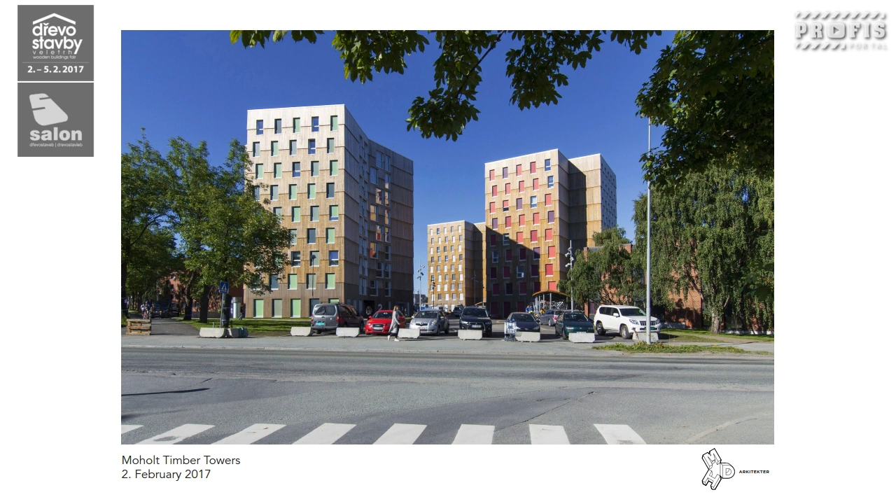The project came into the office in quite an unusual way, through a competition win. What wasn't so usual about the competition was that young architects were invited, architects with less than 8 years of experience, together with a more established firm. So for this competition, we collaborated with an older office, a one-man office, Arne Henriksen, and we were fortunate enough to win it. That was in 2013.

This ambition for the student organization in Trondheim to invite young architects was a clear signal to us that they really wanted to do something else, something new.

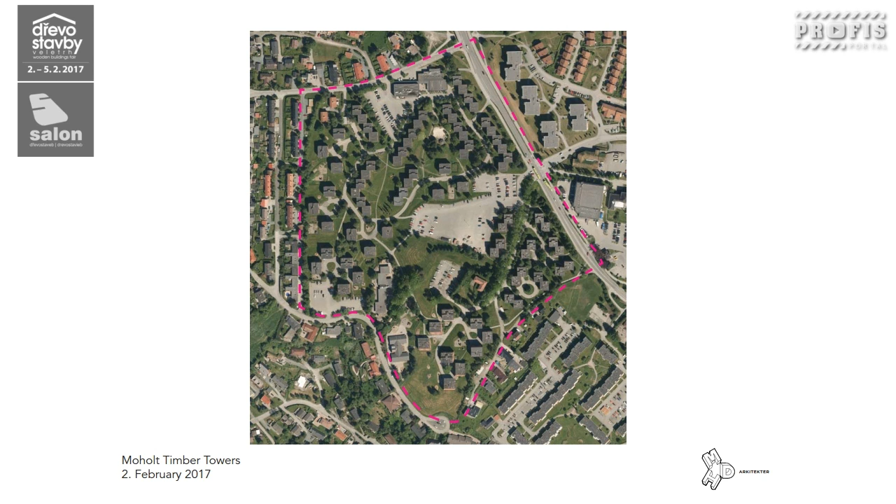The project is called Moholt 50/50 because it represents a milestone for the student village. The student village, which you can see here with the red marking around it, was built between the 1960s and 1970s. The competition was organized when the Moholt student village turned 50 years, and it sought visions for 50 years ahead.

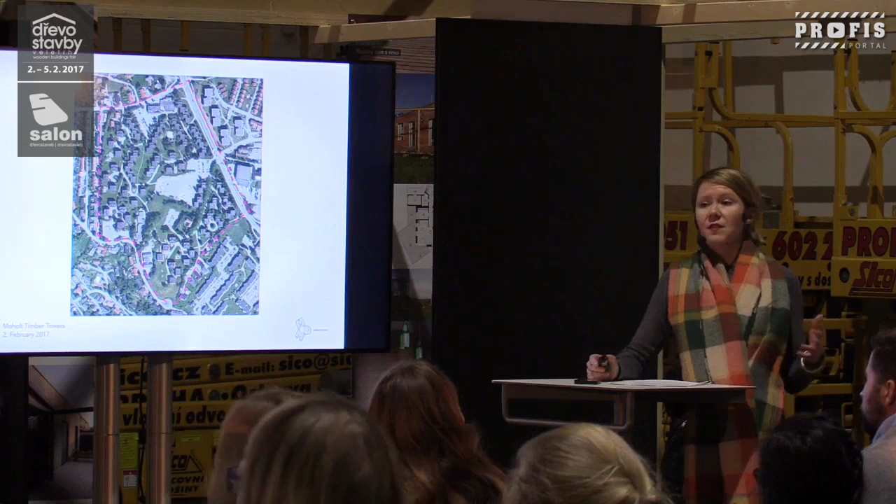That they wanted a vision for 50 years ahead was also promising, because they own these buildings and manage these buildings. So they wanted something that was manageable and sustainable for 50 years ahead in time.

So it was a quality ambition, a little bit out of the ordinary for housing. Many times when you build housing to sell, once you sell it, you're not so interested in the sustainability or manageability further in time. You just want to sell it quickly and easily.

But the student organization was interested in solutions with ecological benefits for a long-term perspective, with maybe a little bit more expensive investment, but which would pay back in the course of the coming years.

Student accommodation, this is the existing buildings. Student accommodation often plumbs the depths of mediocrity, like hutches stacked up in the simplest, cheapest way, without any support programs, left to themselves in a kind of anonymous place.

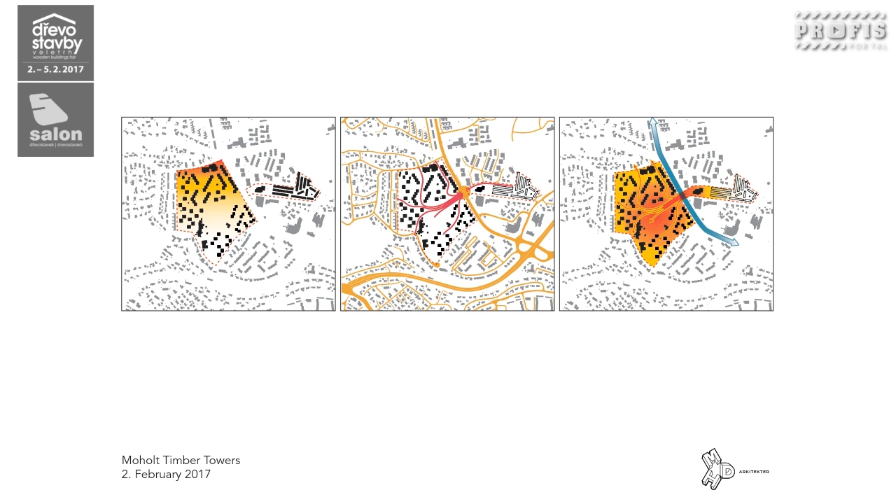Here's a big road, and there's the collective transport, so all these houses would have easier access to the collective transport through the village. It also encourages collective transport.

So the meandering street, almost like a river, which when split up into smaller paths, became the organizing element for the whole project.

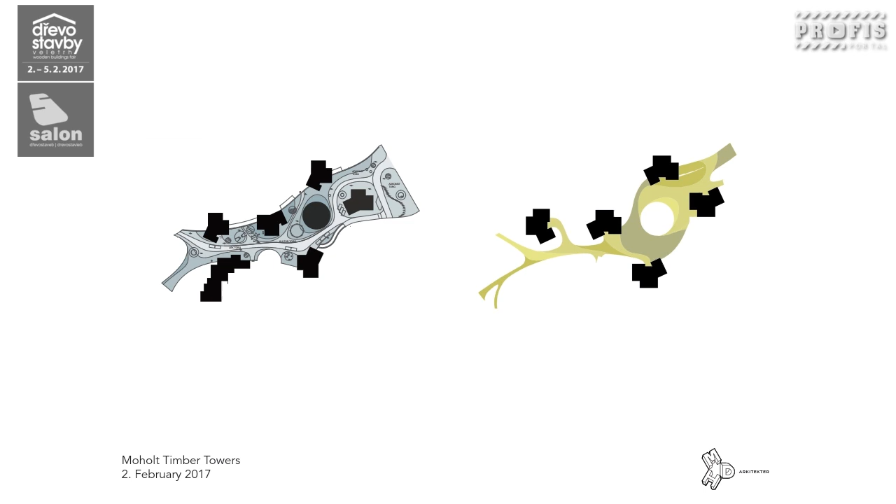The landscape plan was very important. The whole Moholt Allmenningen, as it's called, or Moholt Commons, consists of play spaces, benches and planting, and simply places where people can meet.

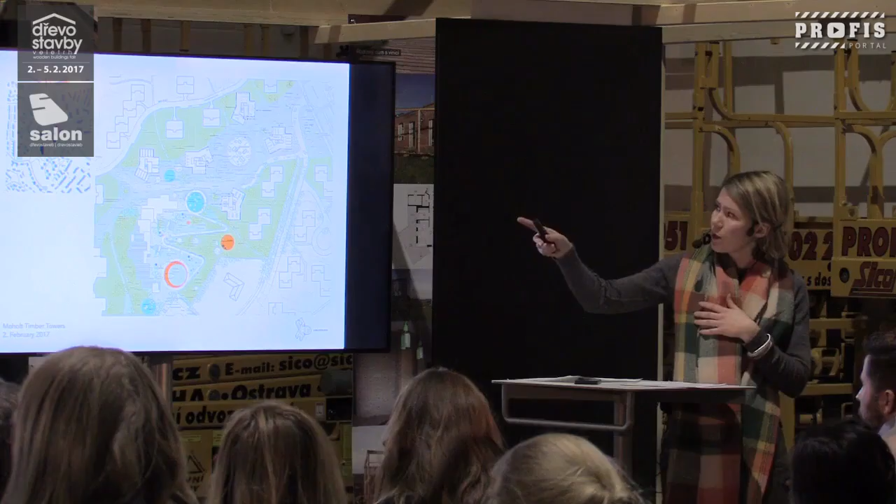Here you see an early plan with lots of things happening. It doesn't exactly have the same configuration today. The configuration up in the corner is what we have today, and this was with another sort of kindergarten at the time.

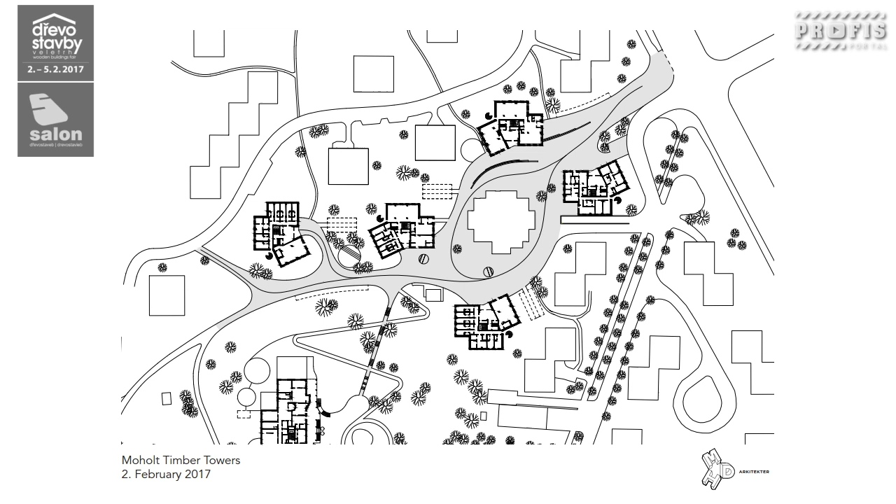This is how it looks today, and the large part of the project is really the student towers. There are 5 student towers, but there's also a large kindergarten in the project, which you can see a little bit of in the corner.

Together, they are actually the biggest CLT project in Europe at the moment. I'm sure someone will make a bigger project soon, but for the time being, it is.

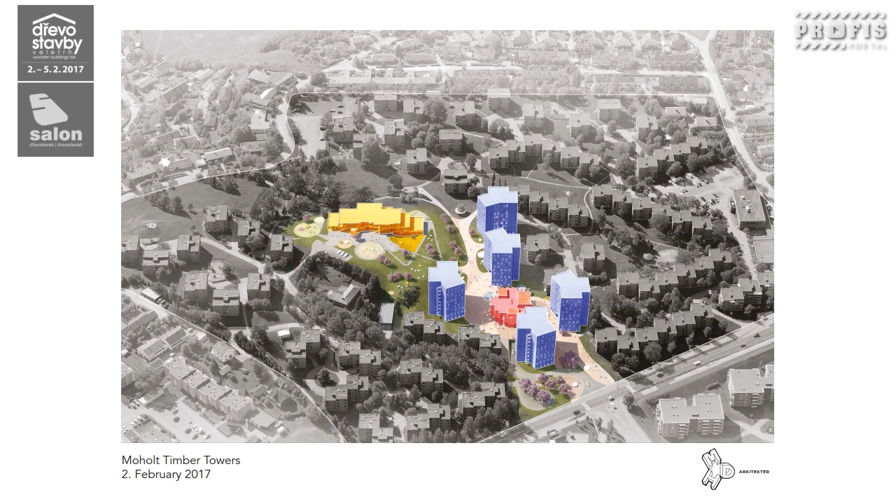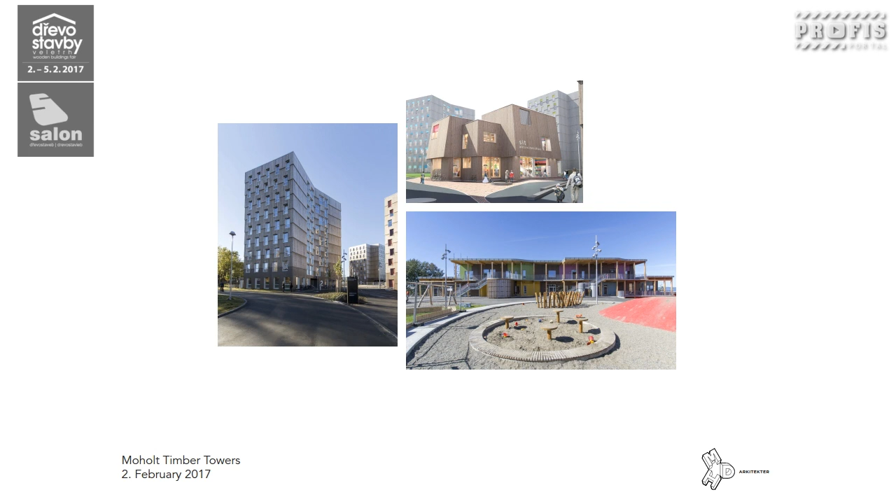Here you see the student towers, and then a picture of the kindergarten and the rendering of the coming library. The library is a local library, but with a big profiling towards students, so we will have study spaces for students together with a normal library.

So here you see the existing student village with the towers. The whole master plan from the 60s and 70s is really representative of late modernism ideals, with similar cubes placed freely in a landscape among lots of greenery. But in present day opinion, it's maybe a little uninspiring as a landscape, and it's maybe lost in the time when it was built.

So we proposed tower-like constructions to mark this centrality, and also to propose a new mark and identity for the student village.

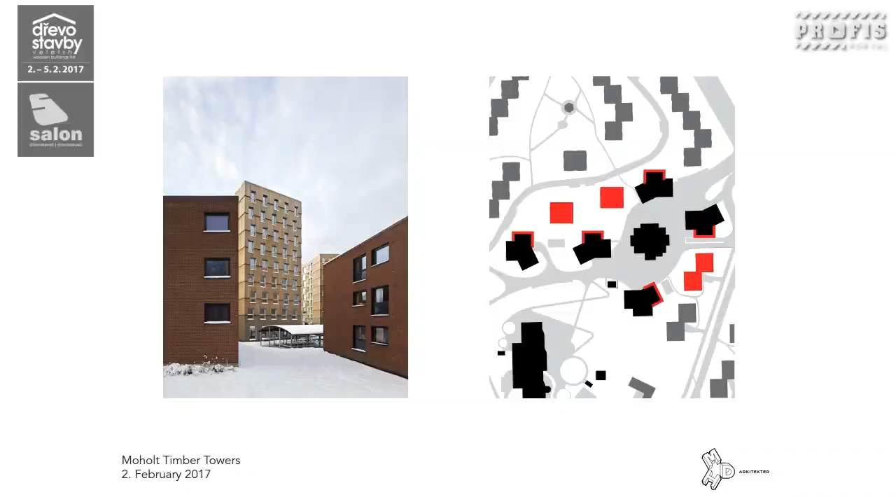The student towers have a Y-shaped form, and this is beneficial for a number of reasons. The large volumes are broken up into smaller parts, and the wings of the building hence meet the surrounding volumes in a better way with similar dimensions. Even though they're much higher, they're still the same dimension in plan.

By breaking up the volume, you also create a more slender and elegant volume by adding more facets to it. The Y plan is an efficient organizer of placing the rooms in the wings, and this creates naturally a central communal space in the middle.

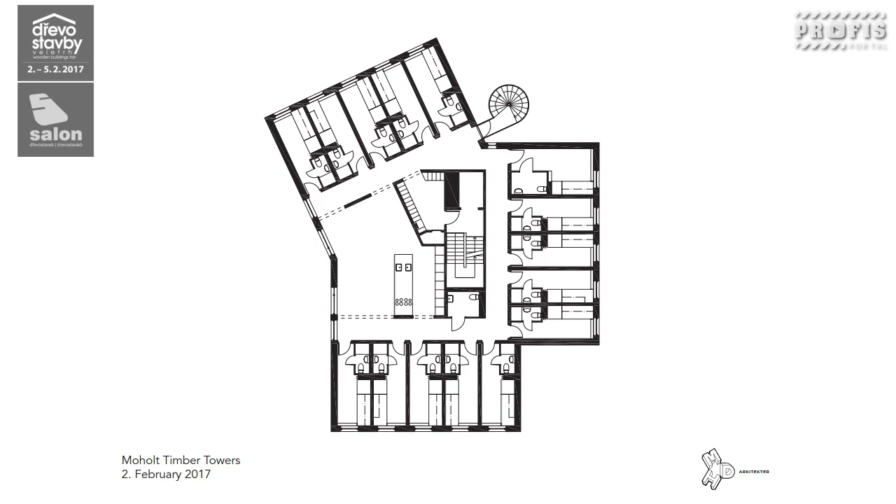Every floor is organized into a collective. They all look similar, except the first floors, and I'll come to that. So you have individual student units who have bathrooms, and then they share a kitchen and a living room space, and an entrance wardrobe, so they can leave all their shoes and clothes in here. Then this is a guest toilet for guests, which is kind of a handicap dimension. One of the cells is dimensioned universally for handicapped use, for different reasons. So it is actually a very, very simple plan.

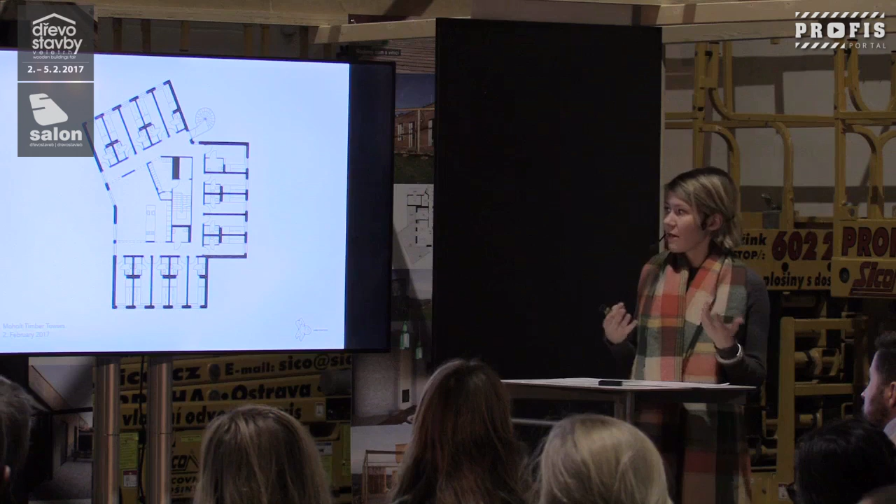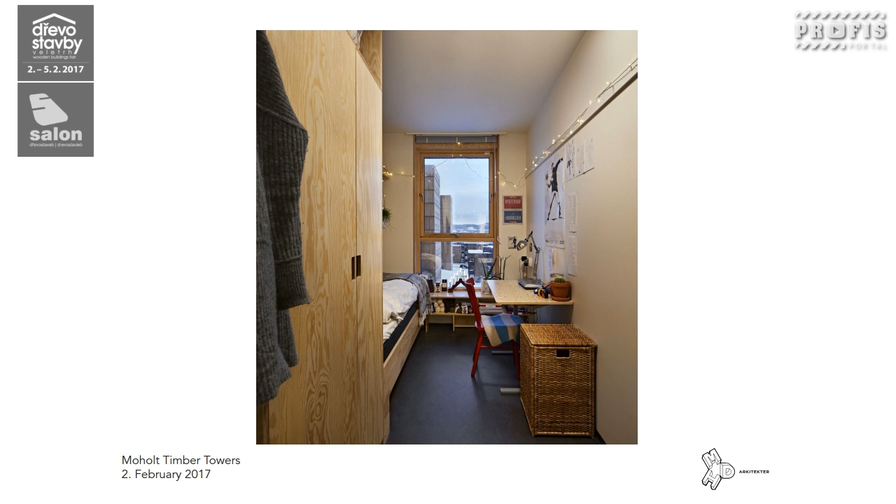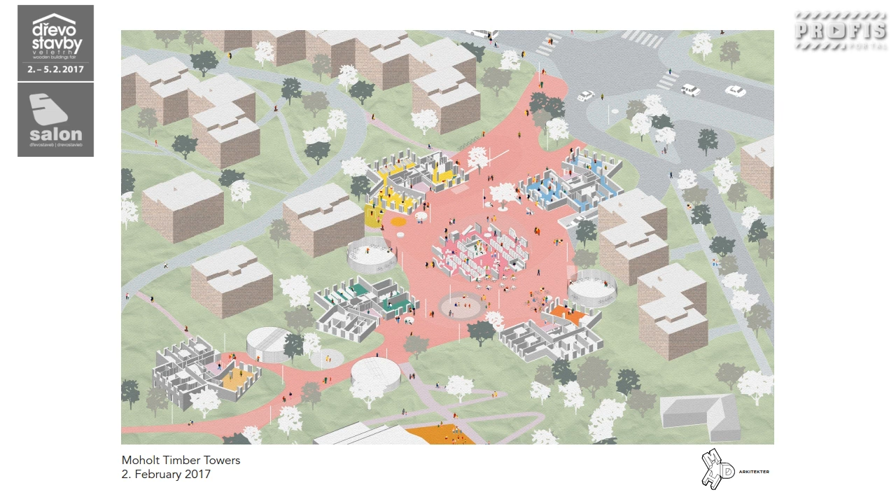The ground floors of the towers offer commercial spaces, spaces that activate the Moholt Commons, and spaces for students. This was something the student organization wanted, but it was also a demand from the city, because if you build higher towers in Trondheim, it gives a sort of signal, and you have to balance this signal with actually offering something public. It's a policy they have in the city of Trondheim.

So here in the blue tower, the blue basement ground floor, there's a health center for students and for normal people, and the yellow one is a training center. The green one is a wash and go unit. It functions as a washing place for clothes for the entire student village, so it is a natural meeting spot for students.

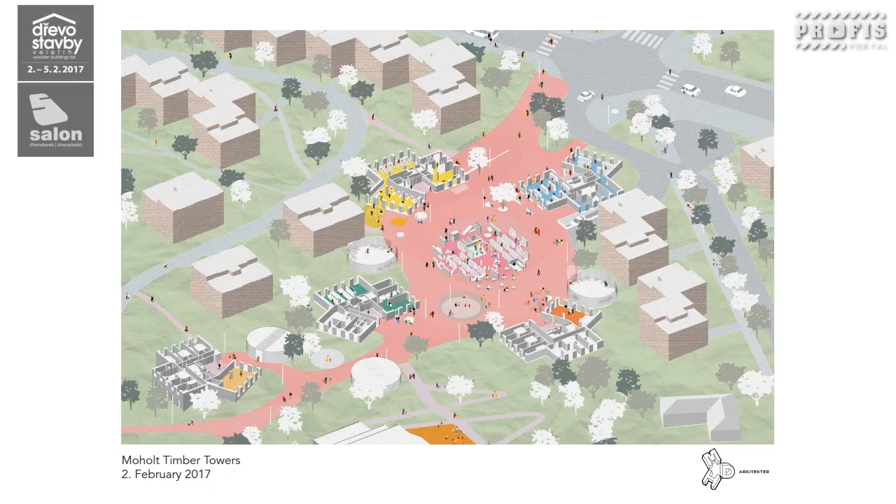There's also a little commercial space here, which is now used by a hairdresser. This space is a grocery store, and this is an activity room, which hasn't got a tenant yet. And then this is the library.

In the competition, we proposed - we knew that student housing is not something that you have to do cheaply. So we proposed a standard steel and concrete structure.

But the project had very ambitious energy goals, and they wanted us to look into if it was possible to build the towers in CLT elements, cross-laminated timber constructions. The towers, with relatively short spans, and also the form of them, gave a statical benefit in a static way actually, without any changes.

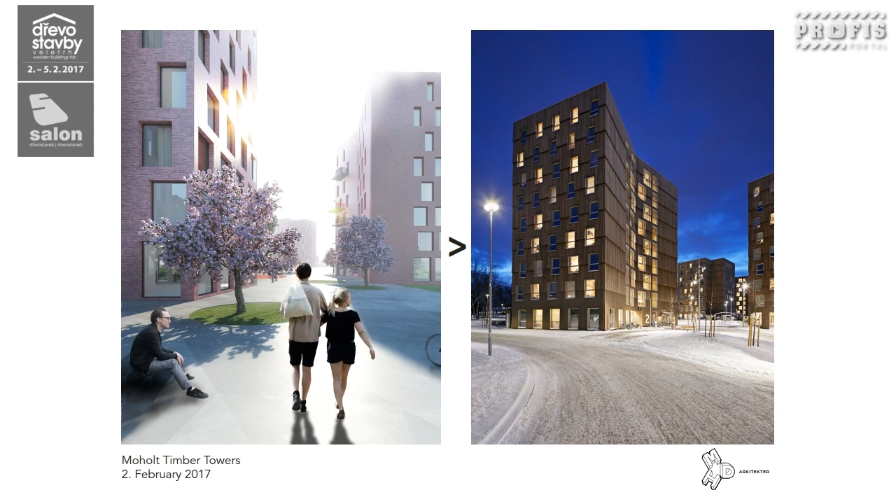So the client completely fell in love with this idea of building massive wood, as they say in Norway - they call it massive wood constructions. But there was a challenge, because at this point, massive wood buildings at this scale were not built very much in Norway. So in order to get a price from a contractor and entrepreneur competitive to standard building methods, they had a very good idea.

They did something extremely smart. They asked a consultancy firm to educate four different contractor firms, entrepreneurs, in how to price these sort of constructions, in order to avoid this kind of extra 'we are a little bit unsure what it's going to cost, so we just add some extra price to it' factor. The goal was to get a competitive price compared to normal steel and concrete construction, and it worked, because they gave prices on both, and in the end they went for the wooden CLT construction.

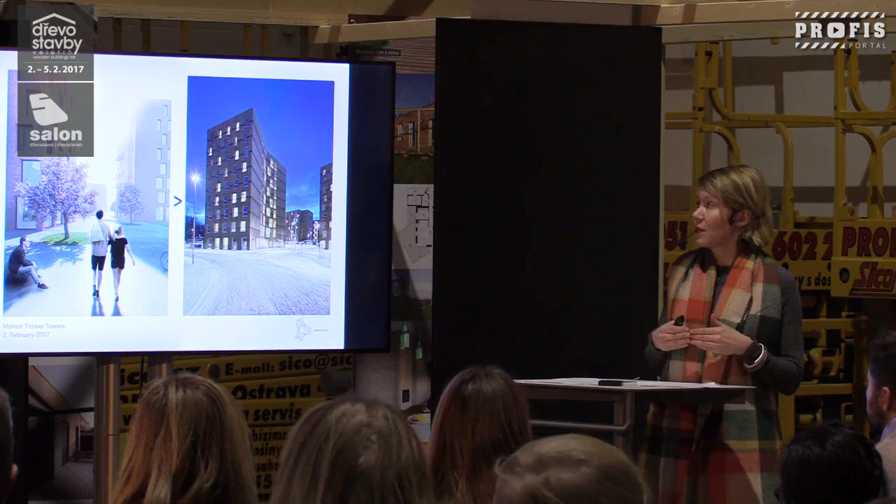For Norwegian standards, it had a very ambitious energy profile. It might be that the energy ambitions in Austria or in Germany are more ambitious.

To meet these environmental profile goals, the choice of CLT in all load-bearing structures was important, and they also wanted to use a passive house energy profile. They made a private heating plant, which consists of 23 geothermal wells, heat recovery from ventilation air, heat recovery from wastewater, and solar thermal collectors.

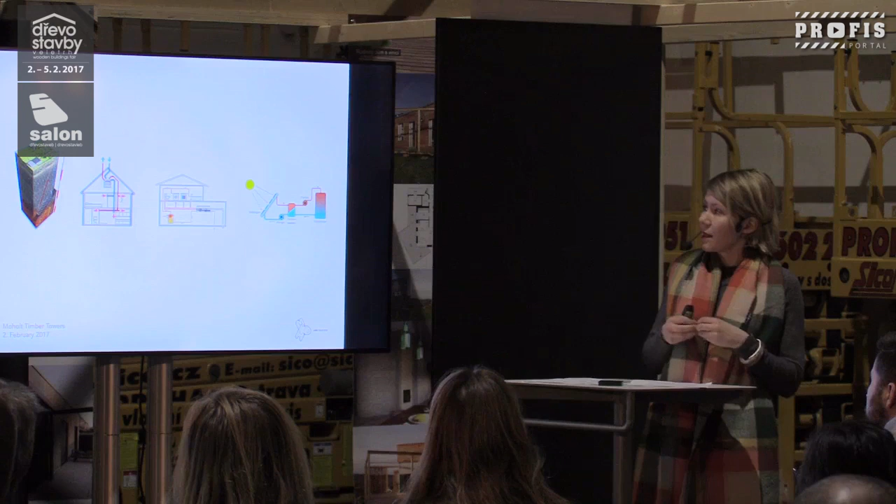These together work as a sort of local heating plant. The energy they produce is bigger than they need for the towers, so it's also heating up the domestic water for the existing small cubic houses.

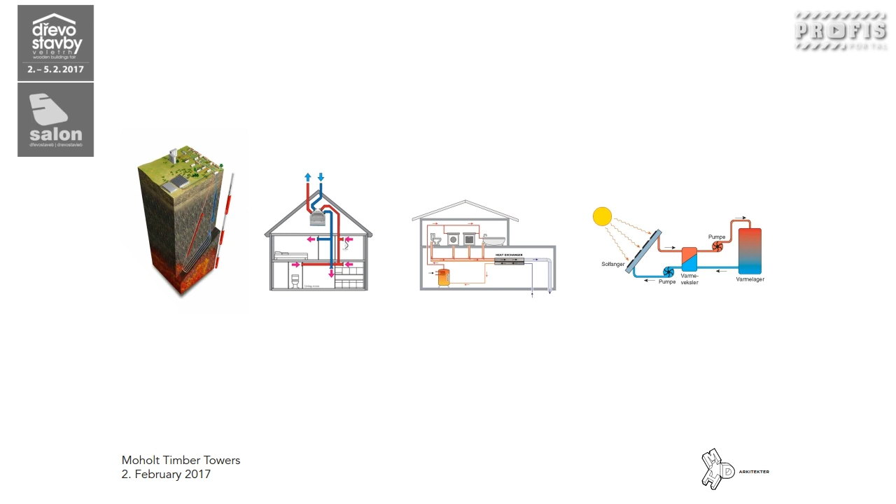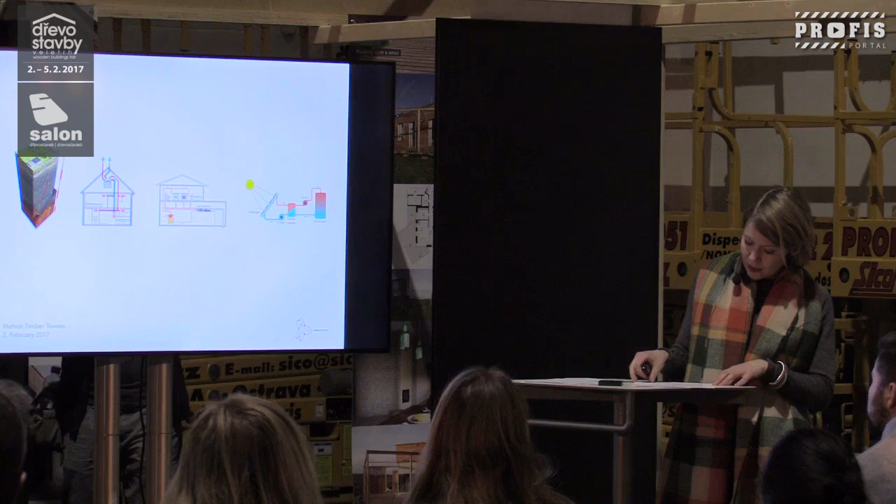The project reaches the objective of at least 50% reduction in CO2 emissions compared to a reference standard Norwegian TEK regulation building. The use of CLT reduced the CO2 production in the building materials by 57% compared to traditional construction methods, and the CO2 emissions associated with energy use is reduced by approximately 70%.

The 5 towers are 9 floors high and 28 meters. This one is actually 10 floors high because the basement is kind of half a basement and half a floor.

When you build towers in Norway, you are only allowed within certain fire rules to build 8 floors. This is not because it's a wood building, it's because it has to do with fire escapes. You can only have one staircase if you have 8 floors. If you go over that, you need a fire escape there for the fire brigade.

But we managed to add an extra floor because Trondheim is one of the largest cities in Norway, the 3rd largest, and they have very advanced equipment in the fire brigade. They have a big fire truck with a long fire ladder, so we could add one extra floor to the building because they could come up this high.

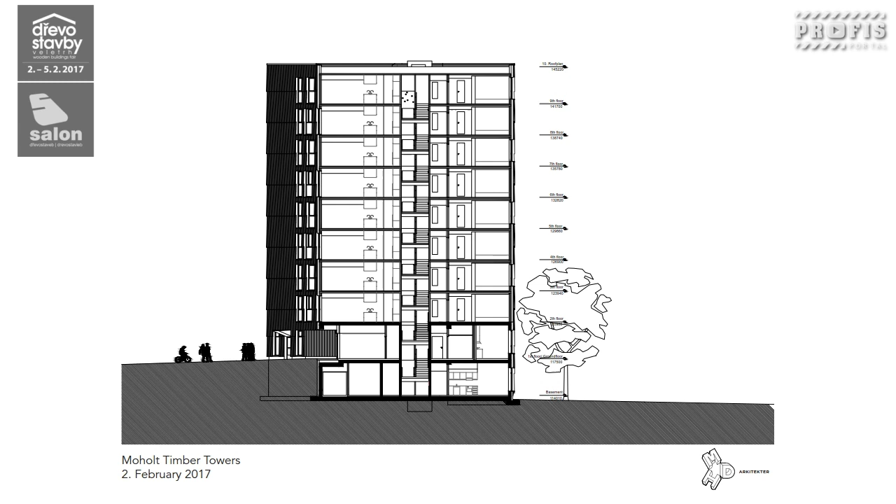All the basement and the 1st floor is constructed in cast concrete, and the rest of the floors are made in wooden structure. In the kindergarten, everything except the foundations is wooden construction, also the 1st floor, and it will be the same in the library. Everything will be in CLT, and all the staircases and elevator cores are also in wood.

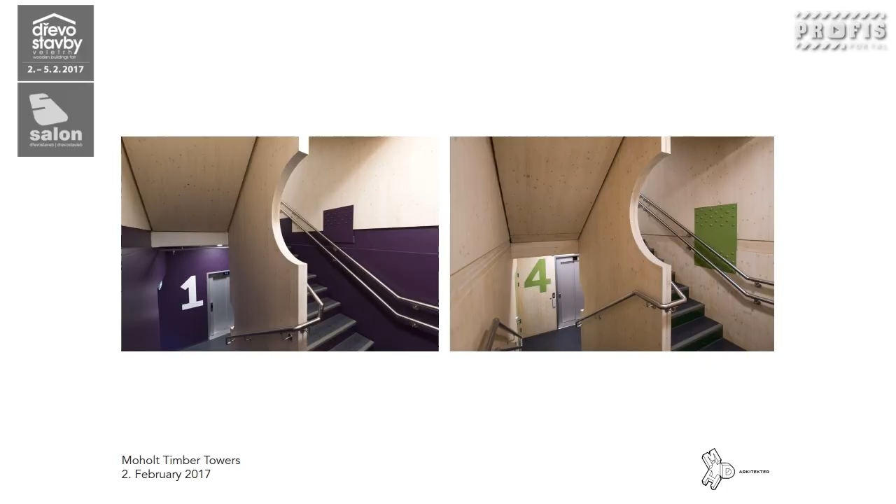And these big steel plates are stabilizers which you find in the lowest floor, but not in the highest floor anymore.

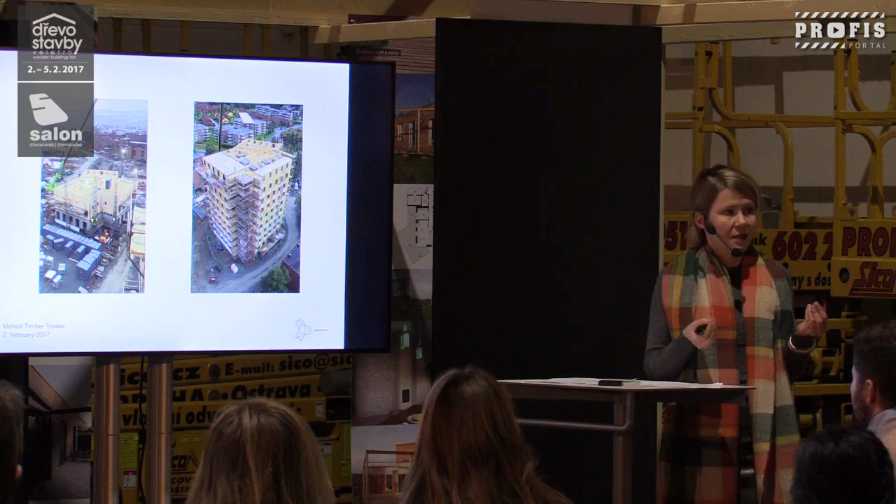The other lecturers have commented on this topic, and the precision and the montage speed is absolutely fabulous. They could build 2 floors in a week. So the raw construction of the first 3 towers out of 5 was done in 12 weeks, 3 months. That's extremely fast. You also get a very clean and dry environment, so the builders are extremely happy to work inside here. There's no moisture and no dust, so it's also health beneficial for the people who work there.

Here you can see in the left image that the bathroom pods are arriving with a crane. They were built in Finland and then shipped to Norway and built on site. It's a bathroom prefabricator who usually makes bathrooms for large ships and ferries. These are made in Finland and came to the building site.

The precision of the wood, as I said, is really, really great. That gives us architects a fantastic room to work with details, and we don't have to work with a tolerance of 1 to 2 centimeters like sometimes when concrete element work is really poor. Here it is really down to millimeters.

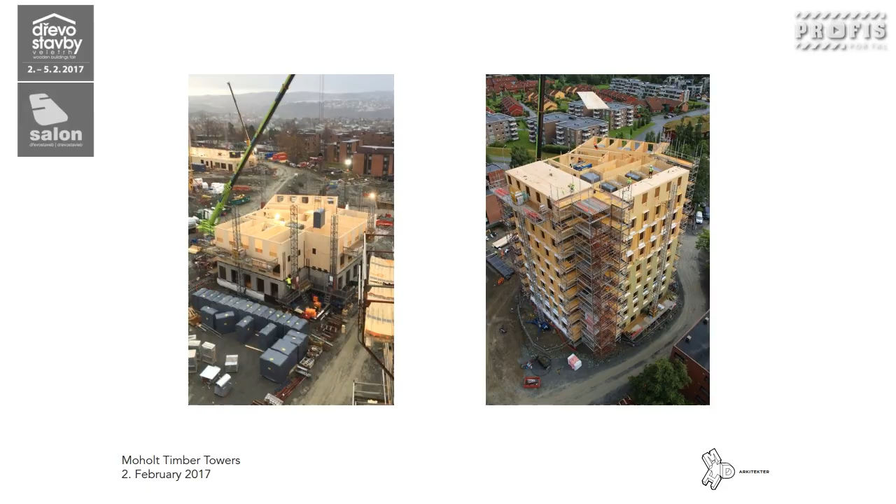The only unevenness that was created in these constructions was, of course, the first floor, which is cast concrete, so it's better than elements, but still there was some small unevenness, but nothing that couldn't be absorbed by the detailing.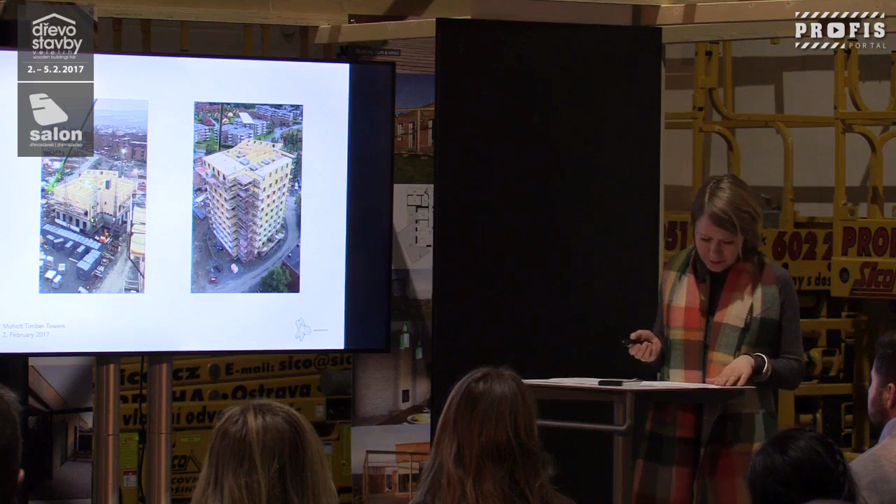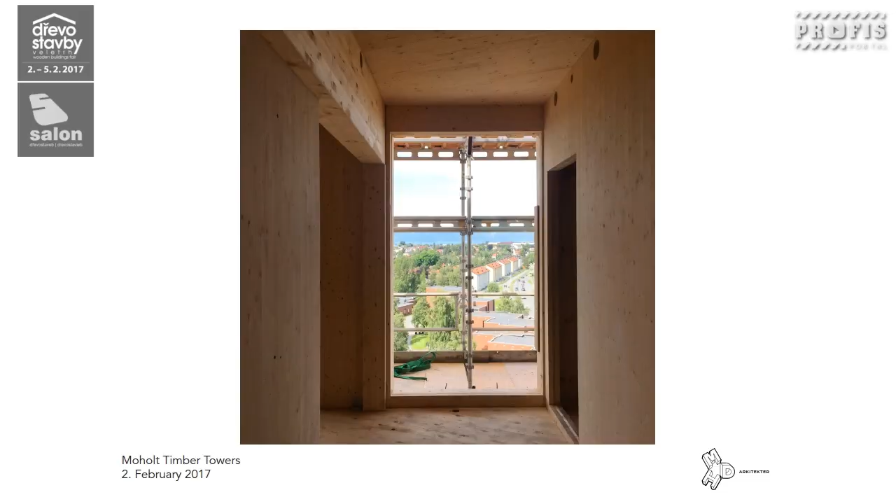Our approach to building with CLT was to take advantage of the finished surface of the CLT element, to be able to expose it as much as possible in the interiors, because wood has the capacity to withstand dents and scratches in a much better way, and it ages in a much worthier way than plasterboards and other plate materials.

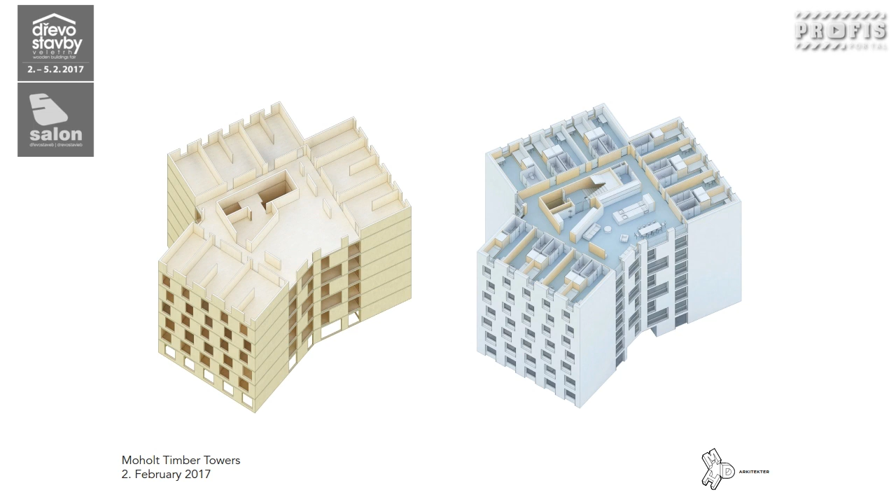Here you see the structure of the CLT structure to your left, and to the right you see the sort of the ready built with some insulation and some plasterboards that we had to put in order to conform with acoustic and fire regulations. I will come back to that.

The whole concept behind the detailing was to convey as much as possible of the technical and aesthetical qualities of the system, the modular building system that CLT really is, and to make this the detailing philosophy. So sometimes we have even exaggerated.

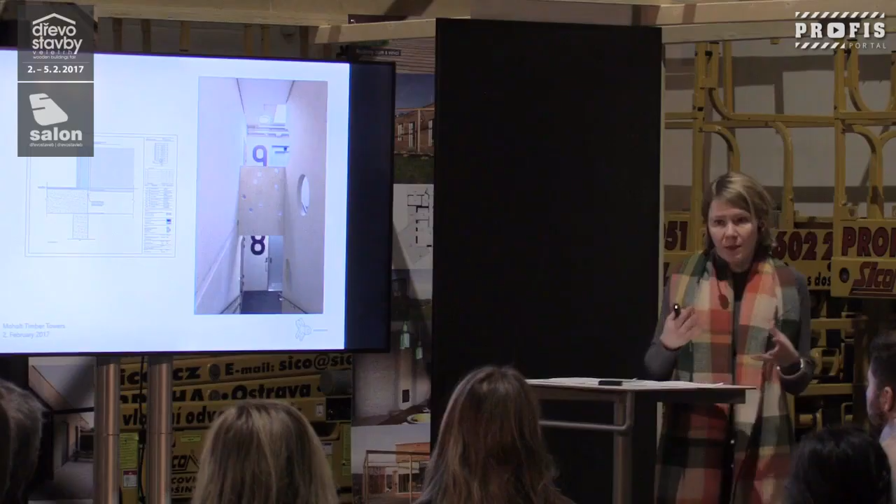Like here, we have a recess in the deck element to emphasize that it's a kind of construction set, almost like a Lego set.

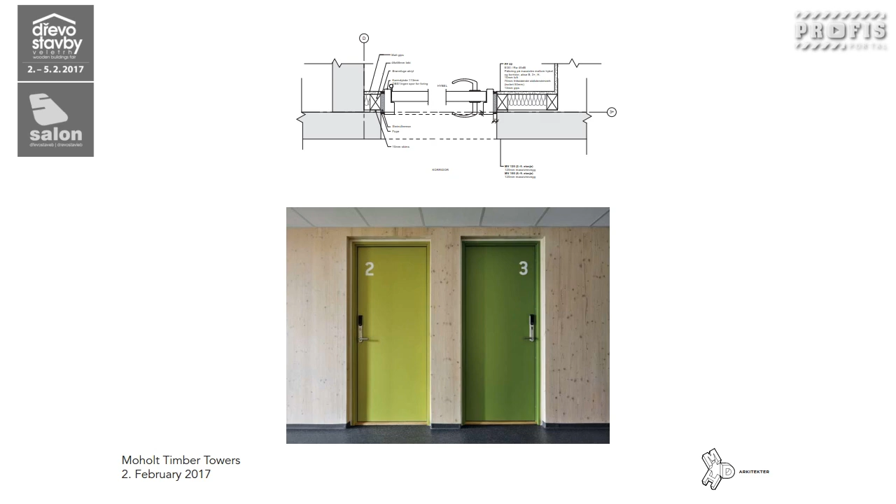There's also always this kind of backbone reflex of entrepreneurs to put finishings around all doors and windows in order to not be so precise as you would want them to be. We had many rounds of it - probably doesn't seem like much, but this was actually difficult to achieve: to expose the cutout of the CLT element, so that the element became the finished corner, the finished surface of the insertion of the door.

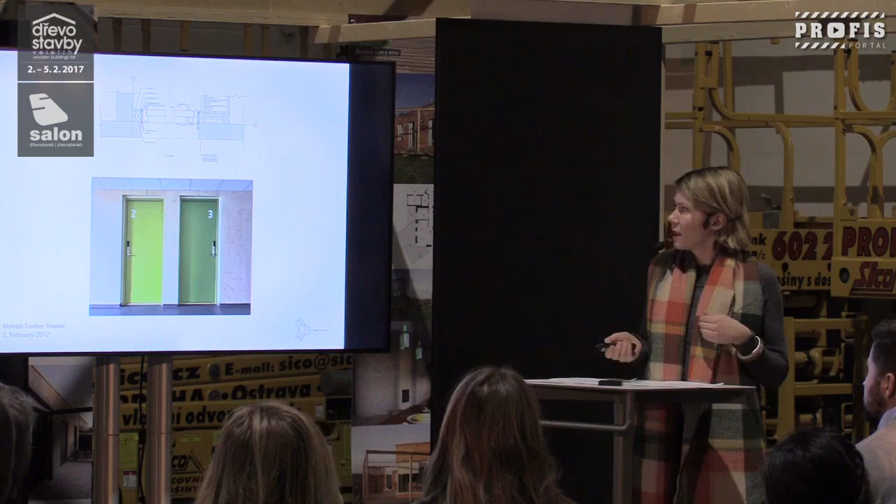On the inside, you see that we have insulation, 50 millimeters insulation, and a gypsum board. This is due to both acoustic and fire regulations. The fire regulations in CLT buildings are not really that difficult - it's really the sound that is more difficult, I would say. And it's illustrated here, actually.

This is a cross-section from the facade. These are CLT elements, and for the longest time we worked without having a false ceiling, because they didn't really quite know if we would need it or not for student housing. If it had been regular housing, it would have been regulatory that we'd need a false ceiling with this type of construction, which is just a CLT element.

But student housing has a little more slack in acoustic requirements because it's not permanent housing. So together with some insulation and a sort of cast, this could have been enough. But they wanted to be absolutely sure they wouldn't get complaints from the students, so we built a small false ceiling.

Of course, the clients want to build more, and also they were a little afraid of putting gravel inside a house. They thought that was a really old-school way of building - we can't put gravel inside a house. But I know this is done probably in Austria and in Germany, it's a standard solution.

So you have the CLT element, then a 250 insulation on the outside, then an air gap and a wooden cladding. Inside you have the same kind of insulation as towards the inside, 50 millimeters plus a gypsum board. One wall is always wood in all the units, so you have gypsum, CLT element, and then the exposed CLT element. This is what one could manage within those fire regulations.

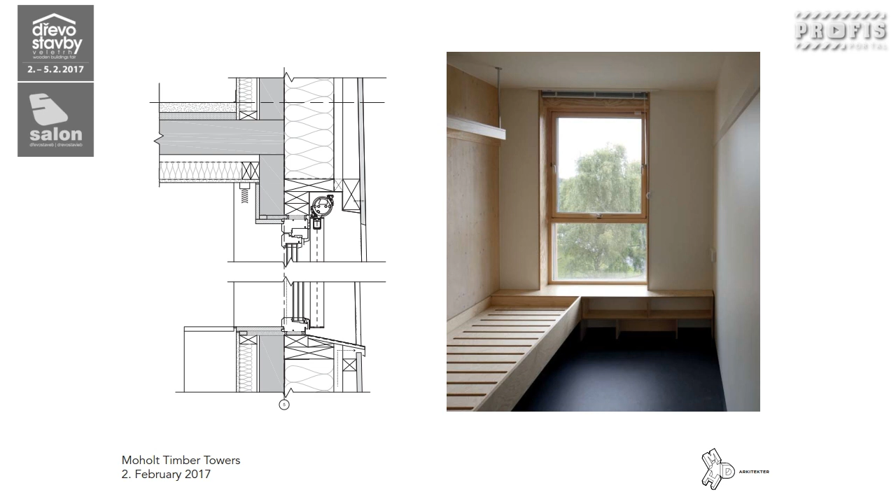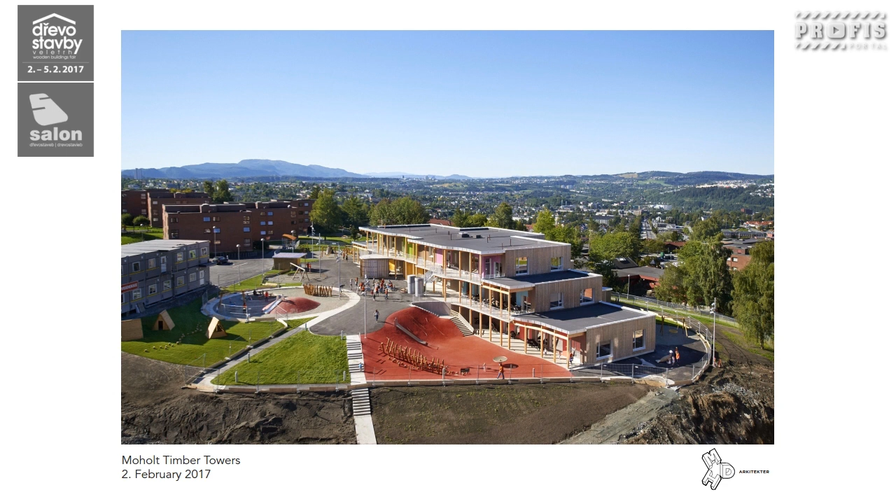In the kindergarten, the sound requirements are not so strict as in housing, and it's also a lower building, so you don't have the very strict fire regulations when it comes to escape, since it's so low. So here we were able to expose the wood from the outer wall elements towards the rooms, and together with built-in furniture in varnished pine plywood, we could create a rather wholesome interior experience of wood.

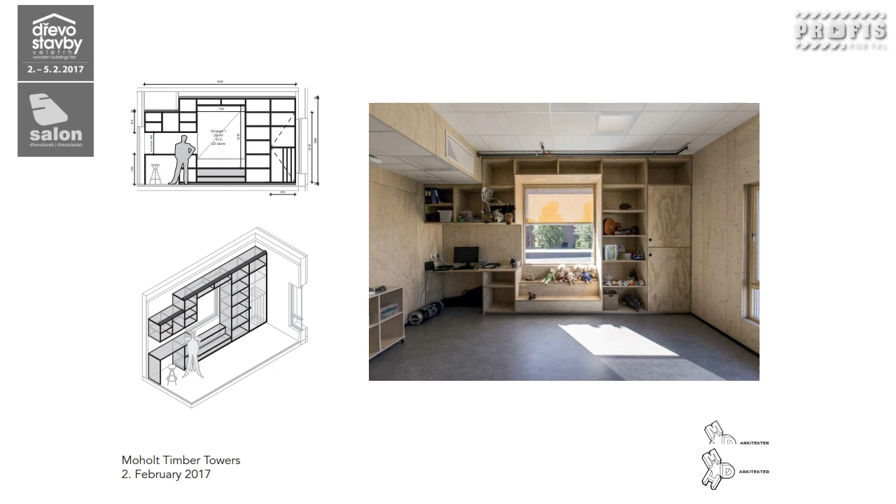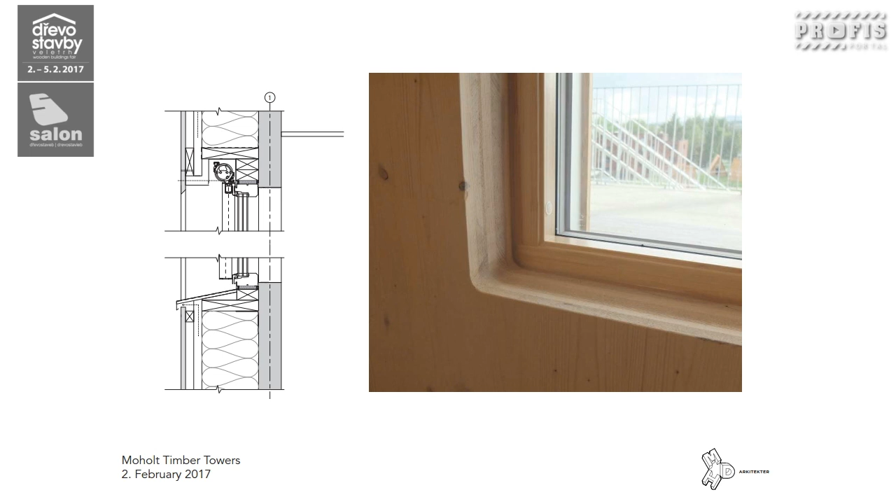On the outer wall, we did not have to have the insulation plus a gypsum board in the kindergarten. There we could just have this detail where the cutouts for the window are the finished surfaces, actually.

Here you see 3 different wood elements, wood products. You have the CLT, you have all the dividing walls that are not load-bearing in the kindergarten clad with plywood, and then you have a wood fiber ceiling for acoustics.

And this is just to show the playfulness that you can do with CLT. You could basically just take a motor, a chainsaw, and cut out. It doesn't become so nice, but you could basically do that. If you would want a new window, you could just cut it out.

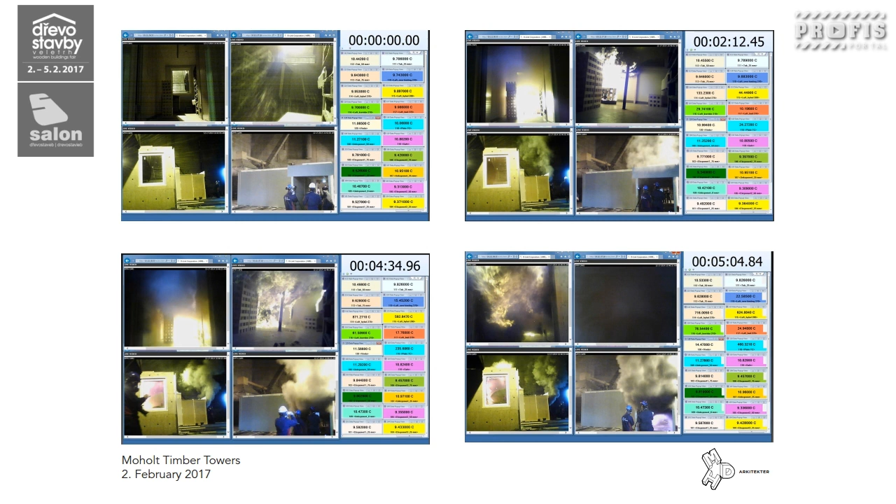What is tricky with these large massive wood CLT constructions in Norway is that there isn't any regulations really on how the perfect fire details or the perfect sound details should be. So everything is a very tight work with the consultants, and you can just hope that you get a really good consultant. And we had that.

We had a really good fire consultant. And what we did as well was that we did a full-scale fire test of a unit in Trondheim at the laboratory at the university to see how it really behaves when there's a full fire.

So it was used to see how the sprinklers work, because this is fully sprinkled, the whole house. And the sprinkling is not special to a wooden house. In Norway, you have to sprinkle all houses that are that high. So it doesn't give an extra cost because of the massive wood, it's just standard procedure.

So if the sprinklers work, which they're supposed to do, they put out the fire immediately. If the sprinklers don't work, then this is what happens. The fire develops quite fast, but in order to control that fire, there's a number of things that we can do.

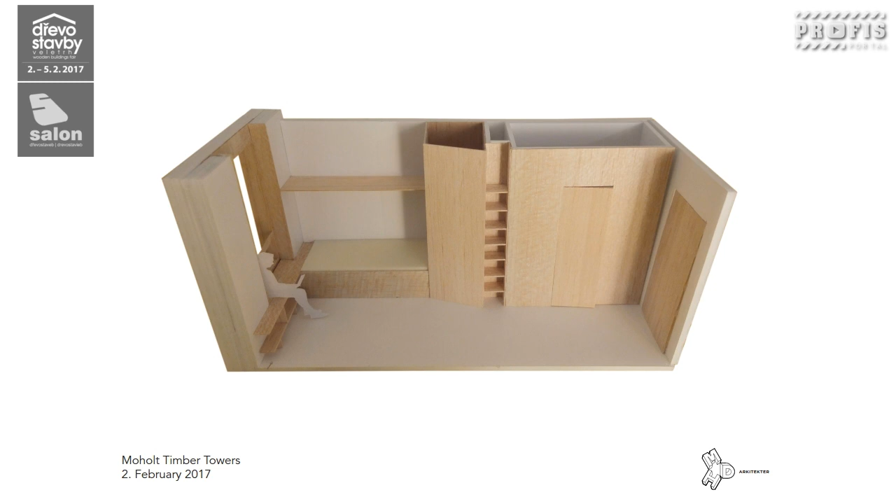In designing the interiors of the room, it was the quality and the sustainability for the further use for 50 years ahead that was again sort of a guideline to us. And the student units are relatively small, so we looked at designing a fixed furniture for the rooms.

And this was beneficial for two reasons. It's economic for the student. They don't have to buy a bed. It's a bed and a cupboard and a shelf and a bench and shelf by the window. So you have all that, and you have also a table. You have to bring the chair, but the table you get.

Because they don't have to bring any own furniture, basically you can just come with a bag of clothes and they can move straight in. And also, throughout the years, it had turned out that if they have their own bed and their own furniture, they tend to leave so much behind when they move out.

So it also becomes a lot of work for the student organization to deal with these furnitures that students leave behind - what do they do with them? It's also not very environmentally sustainable. So it's more environmentally sustainable as well to have fixed furniture.

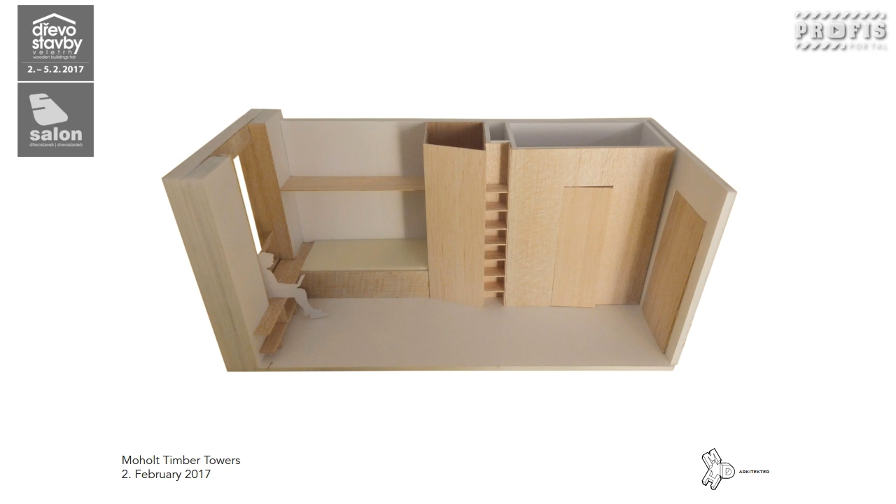And it's a little bit more sensitive as well to the moving in and out periods, because the student village has a rather high turnover in students. So if they would bring their own benches and beds inside, it would most probably create a lot of damage on the walls, and then they would have to maintain and fix all these dents in the wall. So now they don't have to do that.

This is from the student unit. It is very specific to the Trondheim student organization, not necessarily to other student organizations in Norway, but especially to Trondheim, that they really believe in this idea of having students in a collective - that they don't want to provide student housing where you have your own kitchen and a toilet and your own sort of, almost like a mini apartment.

They have a sort of attitude that they want to foster tolerance and cooperation, and it's important as well for these young students to learn how to solve small, insignificant problems like who washed the dishes the last time. This is something that they want to train with the students, because the students are not that old when they start studying, and it's their first time away from home as well.

And in a city like Trondheim, which is a big technology town, you have students coming from all over Norway. So the collective is also sort of an idea - the idea that maybe you find someone there. I mean, you don't have to be friends with everybody, but you find someone there that you can get to know a little bit better when you're away from home.

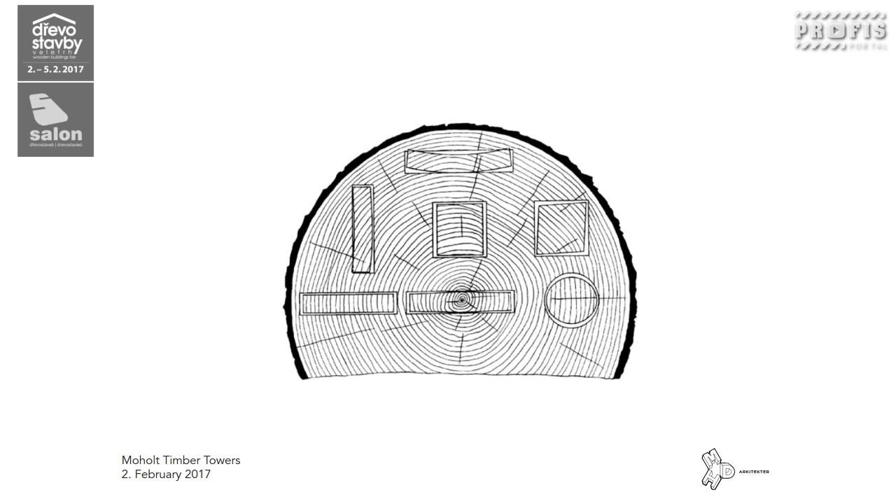How do you make sure that the cladding doesn't get tension? So in order to deal with this problem, we designed a sort of telescopic facade, which would absorb the shrinkage during time.

And we were inspired by two things. We were inspired by the pine cone, with kind of overlapping scales. In the wooden cladding, it always overlaps the underlying end grain, so it doesn't absorb water.

And this is also a very traditional detail, which is seen in stave churches, because stave churches are also massive wooden constructions with a wooden cladding on top, which is almost like a big raincoat. And in the same way, the cladding of the towers also works as a raincoat.

What kind of wood the facade was going to be in the end was also subject for many discussions and many work meetings. Originally we proposed sort of a hardwood, but that would maybe need a little bit of maintenance, and maintenance was from beginning to end a leading topic in all the decisions.

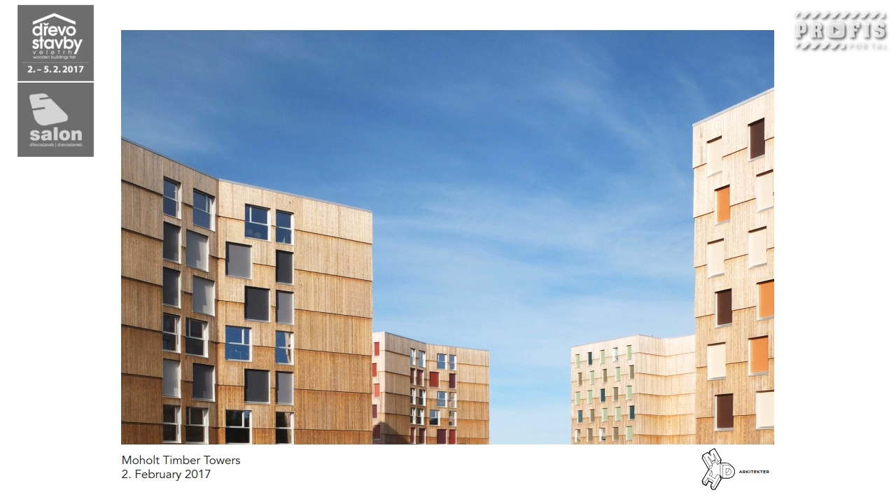Yes, there you see the towers together with the existing buildings. And one of the themes that became really, really sort of beneficial or unexpected was the solar shading. We hadn't counted that this would make such a big difference, but it did.

We proposed that we needed solar shading in all the other facades except the one that's straight north, and these would then go down automatically. But you could also lift them up if you don't want to have the solar shading.

So we chose to propose that all the towers have a different color to give it a little bit more playfulness. Surprisingly, this simple idea was very, very liked by the student houses. This was one of the ideas that they took immediately. But there was another set of ideas we had to work a lot with to get through. This they liked a lot.

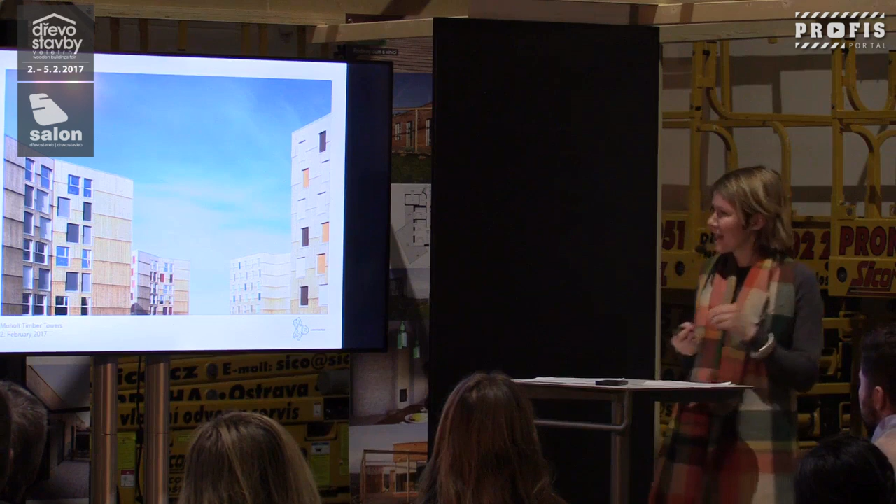So tower A is green, tower B is red, tower C is brown/orange, tower D is gray, and tower E is blue. And we also used the same color schemes inside the tower and the entrance room to give it a little bit of identity.

The engineer was fantastic for the structure. He really knew what he was doing, and he was a specialist in wooden constructions and CLT. And also the fire consultant was really great. Those are basically the main consultants. And also the acoustic consultant was really good.

And this collaboration was awarded a couple of days ago, actually, when we were selected to the 40 shortlist in the Mies van der Rohe prize from 355 nominees. This was really great.